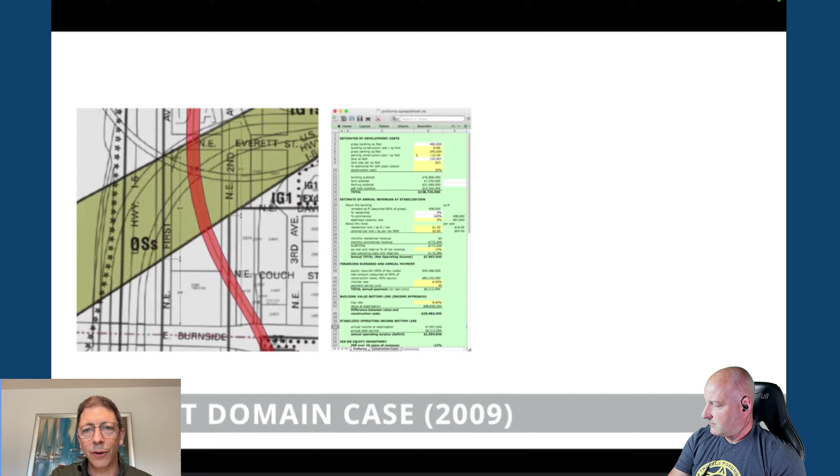But I had an opportunity with a contact who had been hired to work as an expert witness on an eminent domain case. These are condemnations, real estate matters. They don't often go to trial, but in this case it did go to trial. You can see on screen this little spreadsheet. My client was going to testify and didn't think the jury would find his spreadsheets explaining the valuation of buildings particularly interesting. So he asked me for some help to visualize different scenarios they were looking at for massing of buildings and how that affected the valuation.

We did a crude little rendering using some Google Earth background, which was pretty sparse at that time. But it was interesting. We put together trial exhibits in about 6 weeks. Then he introduced me to his clients at the city of Portland, and they were in the middle of defending a civil rights case.

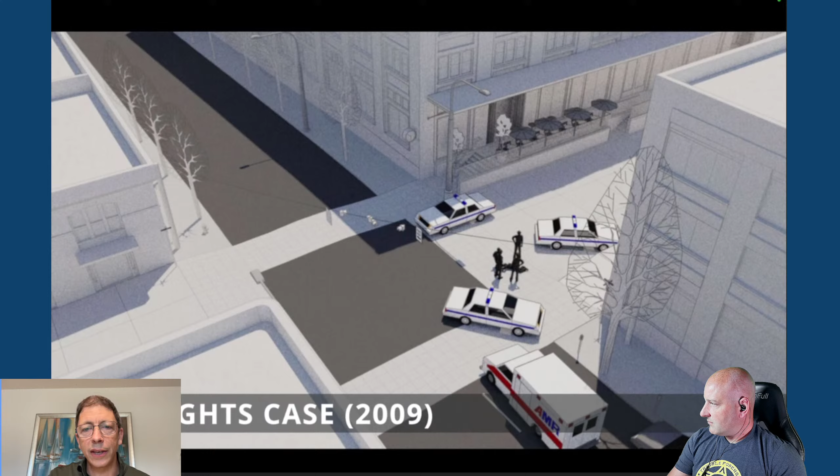We built a digital 3D model and matched it to kind of get a sense for where people were at the moment of the incident, and then created this 3D model, which I'm going to show you now what that looks like. The idea was to use this model in federal court to figure out what witnesses could see at different points. They have a touch screen at the witness stand. We could ask a particular witness, hey, what could you see from where you were standing? Show us where you're standing.

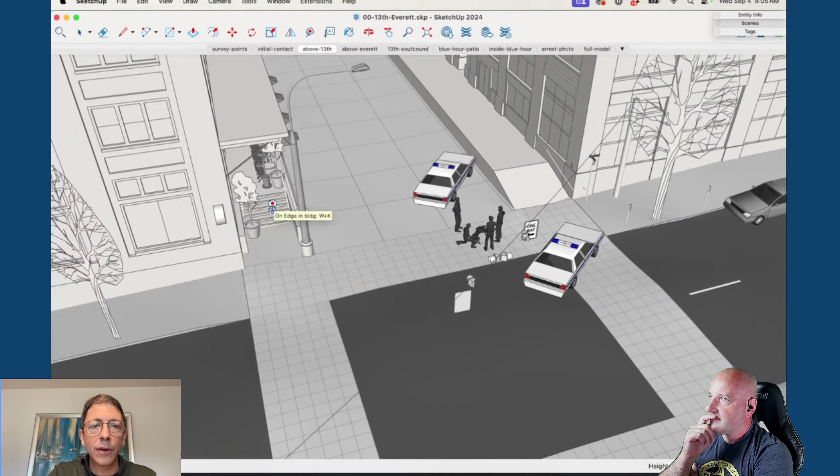Oh, I was on the stairs. We can put them on the stairs and look around to see what they could see from that vantage point. In fact, it worked really well when we tested it, but then they settled the case a couple days before jury selection started. What really opened my eyes to the usefulness of this approach, though, was that we ended up being able to use this model with a whole bunch of different stakeholders in the case.

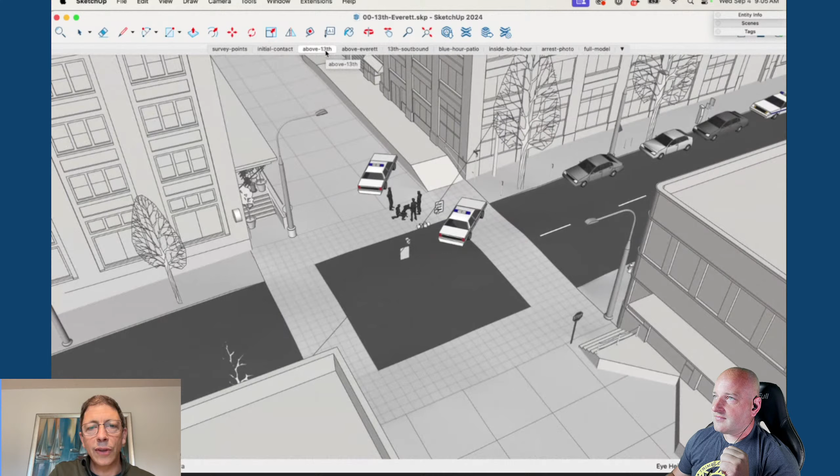So some of the witnesses that were friendly to our client, some of the risk management people, other parties that were in the lawsuit - it really helped give everyone a sense for what were the key issues, how do they need to tell the story, how could they get on the same page about what they needed to do for their case strategy.

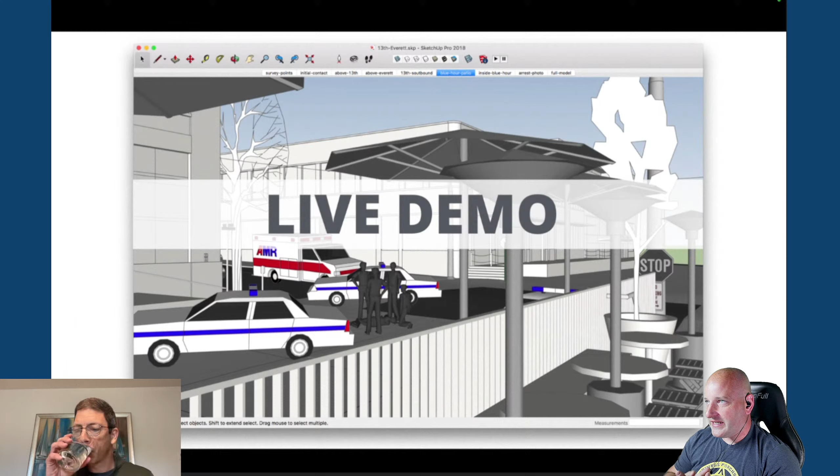Joshua, you know what I really love about that? It is clear and concise, right? It is just incredibly clear. One of the things with your company is visual stories or visual storytelling. A lot of times the photos and the videos, things can get lost in the weeds, right? One of the things I just love is being able to focus the eye, being able to focus on what's important there. That's really, really cool.

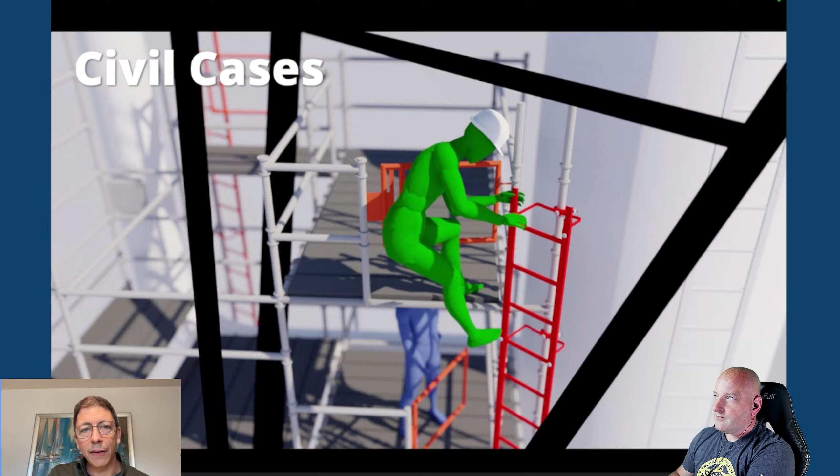Thanks. So today, fast forward 15 years, Fat Pencil Studio is a design firm. We're located in Portland, Oregon, and we use visual tools to help attorneys make a better case. We have 9 people on staff. They have a background in art, film, architecture, construction, and we've worked on over 700 different cases, both for plaintiff and for defense. On the civil side, we do anything from personal injury to civil rights cases. On the criminal side, we've done everything from DUI up to capital murder. That broad base of experience gives us a lot of ideas for how to present different issues in a case. So what I'm going to talk about today is visual stories and how you can use visual stories to make a better case.

And I'm going to come at it from 3 different aspects. I'm going to talk a little bit about scanning and some of the benefits and problems when it comes to using that information. I'm going to talk about our use of SketchUp. And then I'm going to talk a little bit about accuracy, because it's an important part of whether these diagrams could be admissible in court.

So let's start with the scanning. I first became aware of the possibilities of laser scanning going to different conferences, both for the ACSR, the Association of Crime Scene Reconstruction Professionals, as well as the IFSM group. So many of you may be familiar with those 2 organizations. And I saw some amazing stuff in the sessions that I attended. And I asked some of the presenters, hey, these are great scans you're putting together, and how are the attorneys using it? And I guess the answer that I received was, they don't know what to do with it.

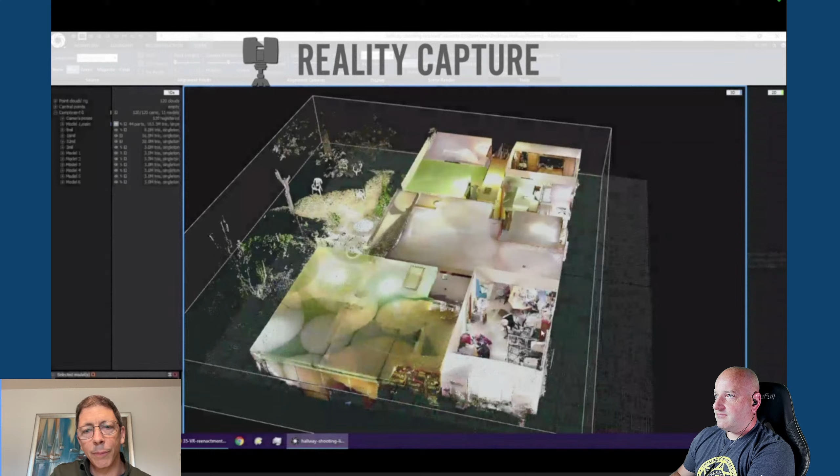We send it to them and they don't know what to do with it. And that was different than the experience I'd had to that point, creating digital models in SketchUp, where we did a lot of collaborative work with the attorneys and experts in the case. So I started to think about why is this a problem, that these great point clouds are being generated and it's hard for people to use.

And if you think about moving that around to cloud storage for different parties, somebody might spend the better part of an afternoon trying to download it, and then they get it on their computer, and maybe it doesn't run because there's different files, they're not compatible with other platforms. In theory, you'd have these packages that would run on any computer. In practice, our experience is it doesn't always work as well as intended if people aren't keeping their software up to date, or there's different versions of browsers and softwares and whatnot. So the technology can be a big barrier to interoperability and collaboration amongst people on a team.

There's lots of, it looks kind of like a picture from far away, and then you get in close and things are disintegrating into points, and you can see through walls, and you're seeing the outside but not the inside of things. So having a little context, we do this sort of thing all the time, is create context for complicated visuals or images, just helping people to know what they're looking at.

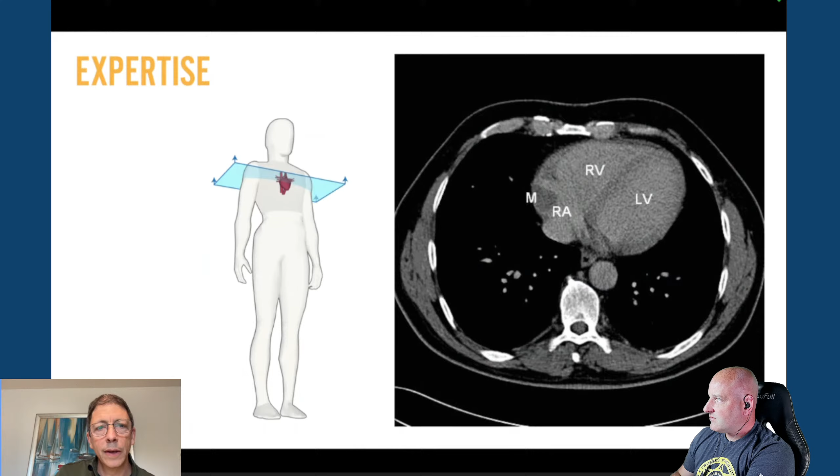And then the final thing that I think is a really an issue that we found working with point cloud data is this idea of storytelling. And how can we add to the data that was collected about a scene in a way that's going to help tell the story of the case? It can be somewhat challenging in these different platforms to add in human figures, weapons, to show a sequence of events. And that's where we've been able to do quite a bit with SketchUp.

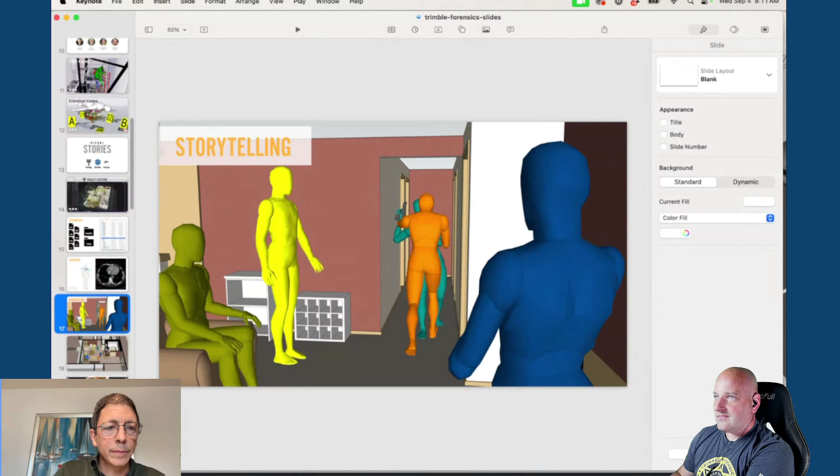Let me just see if I can, at this point, I've got a couple more slides here. This is from a capital murder case that we worked on. You can see here the digital model we built in SketchUp was actually based on a laser scan. And we were able to use that laser scan to measure some key points like the width of the hallway.

And then I'll show you what the actual model looks like. You probably got a peek of this before in the background at the beginning of the webinar here. But let's look at this particular model.

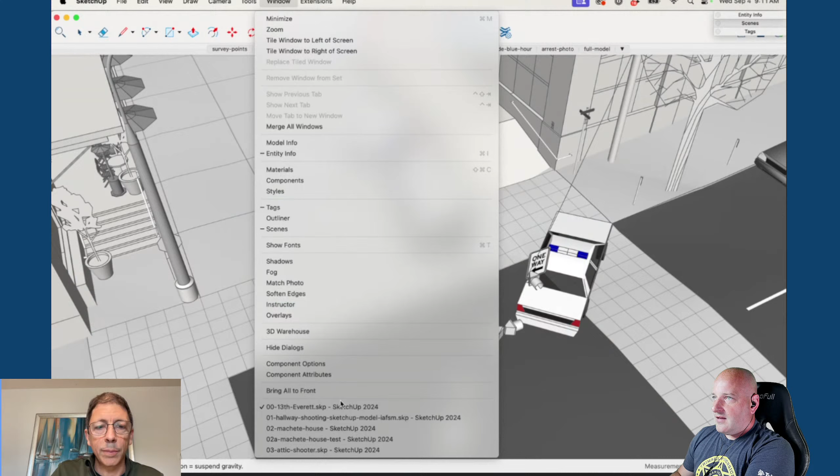And what we're able to do with this SketchUp model is show a sequence of events. So we've got this guy, this sort of teal colored guy who's holding up this family at gunpoint, trying to collect on some debts and a drug dealing gone bad. And you've got, the yellow guy comes back and says, I got rid of this guy's son. He's really upset. Orange guy gets really upset and confronts teal guy.

And then ultimately you can sort of see here, he goes and reaches for the gun. Teal guy's holding it back away from him, kind of pushes him. And then there's a shot. Orange guy dies. Let's look at this from a different perspective.

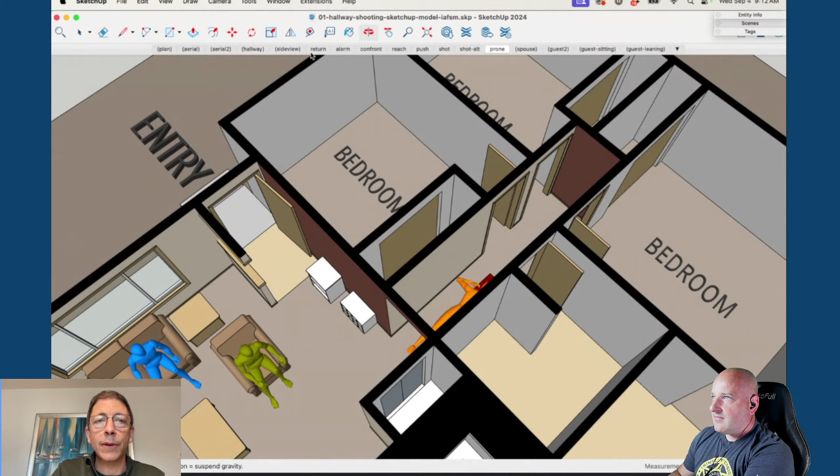We'll go to the side view. And this is, again, one of the great things about a digital model, really easy to look at from different perspectives. So here's orange guy reaching for the gun, pushes teal guy into the doorway. There's a shot, and then orange guy goes down.

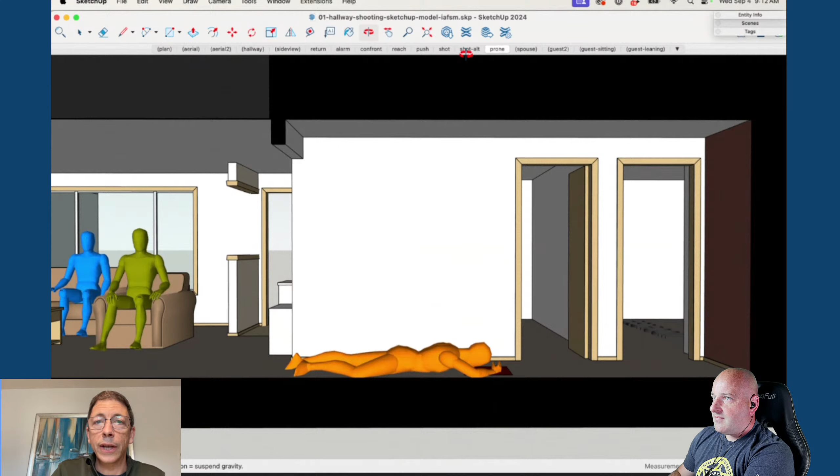And one of the great things about this tool is you can really get in and adjust things as needed. We were able to take this model and to visit with the defendant in custody and get a lot more information about exactly how he remembers coming to fire the weapon and how he impacted the door, and that influenced his pulling the trigger from his telling.

So it's really a great tool to be able to make sure everyone's on the same page as far as what they can see, and what the scene looks like, but also what happened in the scene. And it's really easy to add things. I'll cover that part later about moving people around.

But let me move on to the next portion of the presentation here, and that is talking about how we use SketchUp. I've got an article that I'm going to send afterwards. It's called Drawing to Learn, and it talks a lot about the philosophy, about how the tools that we've learned in the architecture industry and are commonly used in the architecture industry become actually really useful in the process of investigating crime scenes and understanding scenes.

And in particular, I'm going to focus on a case where there was a killing in an apartment, again, probably a dispute over drugs. This one happened with a machete. And I'm going to talk a little bit and demonstrate how we ended up building this 3D model in a case where we didn't have a laser scan for this building.

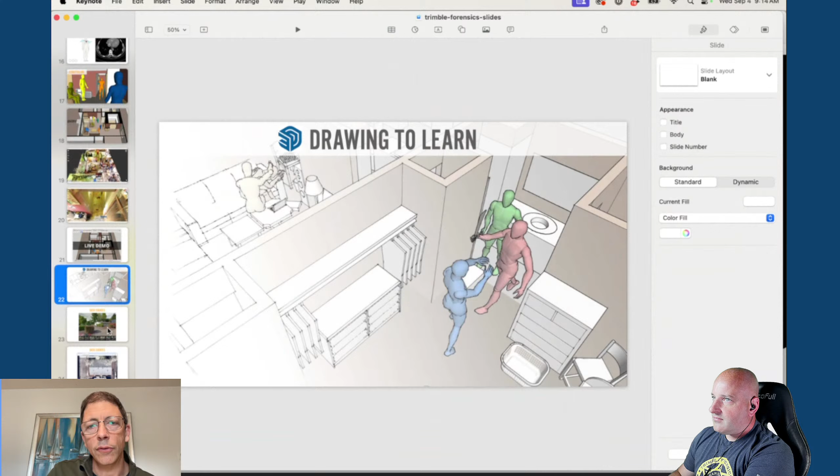And I'm going to start by just talking a little bit about what types of resources we look for to go through that process. So the first thing here, we want to be able to see what the building looks like from the outside.

If you don't have access to Nearmap, that's fine. You can do a lot of the same things in terms of selecting different historical images and measuring them in Google Earth, which you can get both on the web and by downloading a desktop app called Google Earth Pro. But we use Nearmap when we can—it's available in most urban areas, and it is a little bit better in terms of the product for measuring and for accuracy of the aerial photographs.

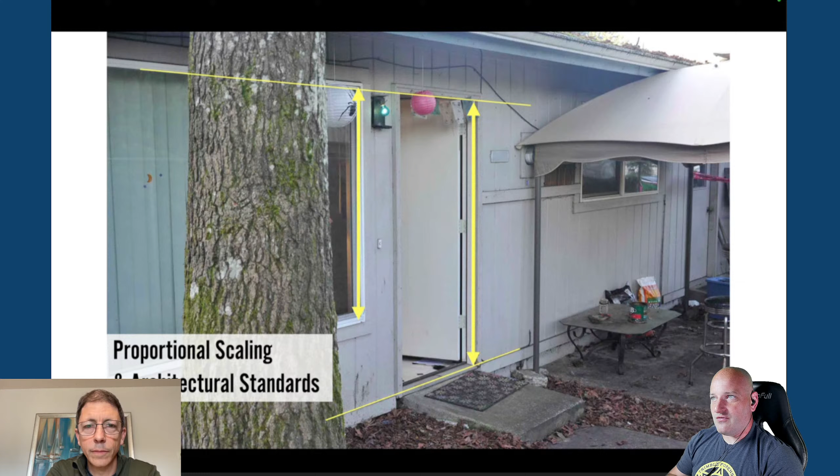While I was doing the job, a lot of times all I've got is a rough sketch, but I still need to be able to tell that story, relate that information. I think it's really neat how you guys use this information to relate that story to the layperson.

Even if we only had a not-to-scale sketch, we probably still know the dimensions of the building because we can measure it from an aerial photograph. We know something about the interior layout because we see windows, and windows obviously go into rooms, and we know something about furniture layout because furniture often has common sizes. We know how big the average stove and refrigerator is, how big the average bed is. Does that mean we'll have great guesses at every last measurement? No, but giving it your best shot and putting everything into a 3D model can be extremely instructive.

In terms of this image, what we're doing is looking at, okay, if we know the height of the door, because that's very likely 80 inches, what can we say about the height of this window? If it was precisely a 90-degree angle, straight-on elevation view, we could just look at the two relative sizes of these arrows. This arrow is 682 pixels, and this arrow is 604 pixels, and I'd do a straight ratio: if 682 pixels is 80 inches, what is 604 pixels?

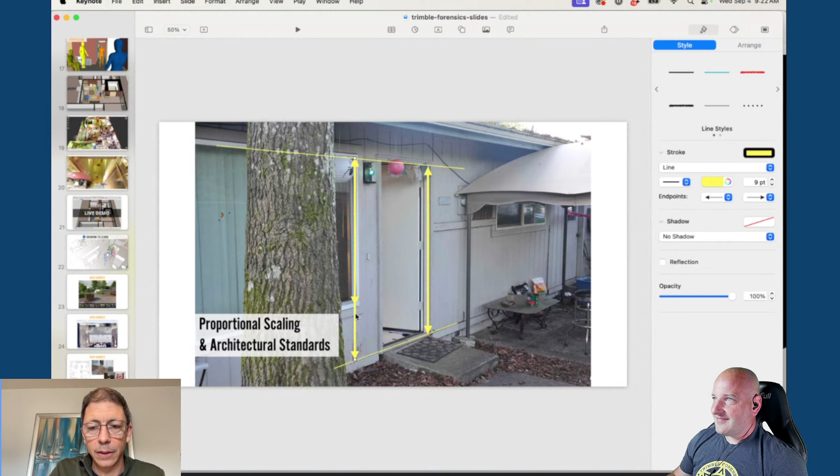But this is not an image that's straight on, there's perspective. So we can still learn what this length is, but we have to apply that perspective. If 682 pixels is 100% of 80 inches, what we're going to do is find out what's the length at that location relative to this known perspective line. That comes out to about 822 pixels or so. Then I find out what percentage — if 822 pixels equals 80 inches, what's this other dimension? And that's a lot of math.

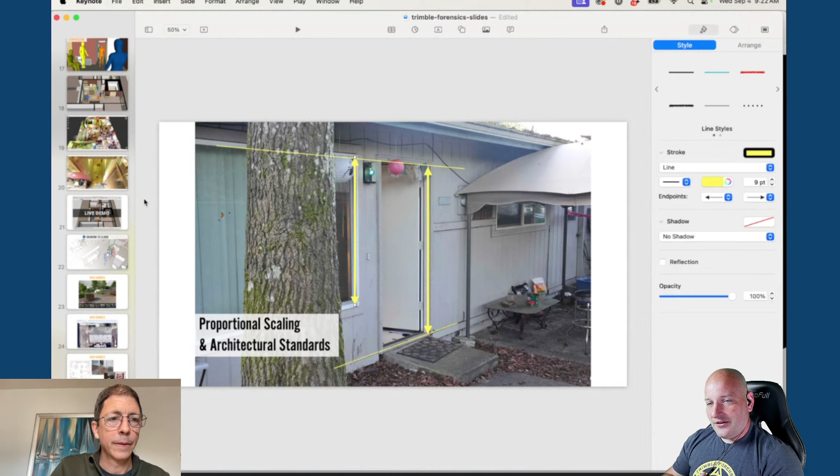Some of the comments coming in are fantastic. One of them, which you hit on, was appliances — your standard refrigerator, stove. As you go through this list, I'm going to add these to this page so we can capture them for future viewers in the notes. So: appliances, fridge, stove, toilets — there's kind of common sizes there. Countertops, that's another good one, there's a standard countertop height.

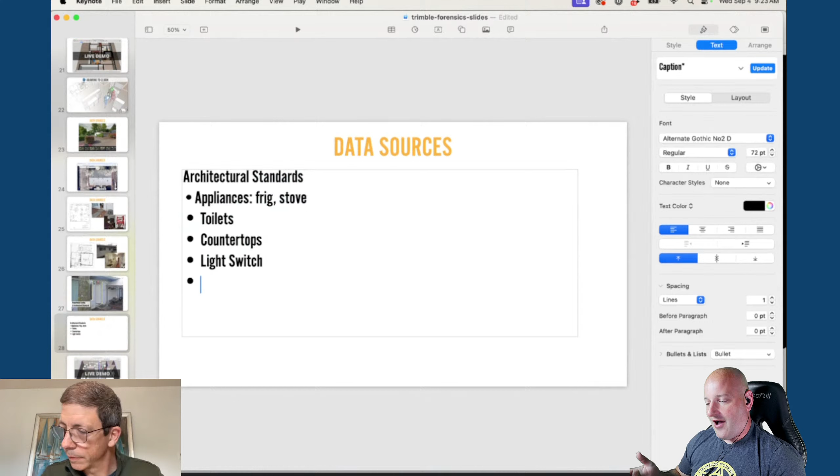Light switches — we can definitely get between the screws or the trim screws on light switches, those are extremely standardized sizes. When you think about it, it's something I didn't consider, how many things are just common sizes, industry standard. Borrowing that from architecture, I think we have a lot to learn from the building side of things, that dimensions are kind of standard.

I'm going to give you a few more here. Doors, probably 80 inches high. But then also in terms of width, there are really common widths — you often have a 24-inch, 28 or 30-inch, or 36-inch wide for residential. Sometimes you get a little bit wider for commercial.

And especially exterior doors, right? Those are almost always 36 inches, unless it's a back door or something really old. Most of those are 36, right? Right, so 36 would be common for an exterior door. 30 is really common for interior. Sometimes you get 24 for a really small bathroom or for a closet, a linen closet or whatnot. And then you get other stuff too, but for the typical doors, these are the most common.

Wall thickness is often going to be 6 inches exterior on residential, and 5 inches or 4.5 to 5 inches interior.

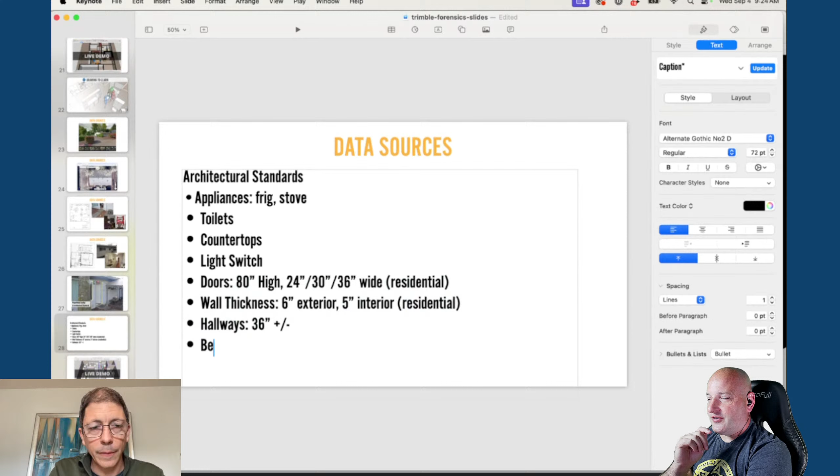And then hallways, very typical, 36 inches, sometimes a little more or less. And you'll always find the less when you're trying to haul a dryer down the hall to the back laundry room, right?

So bed sizes, twin, double. You can look up dimensions of these online.

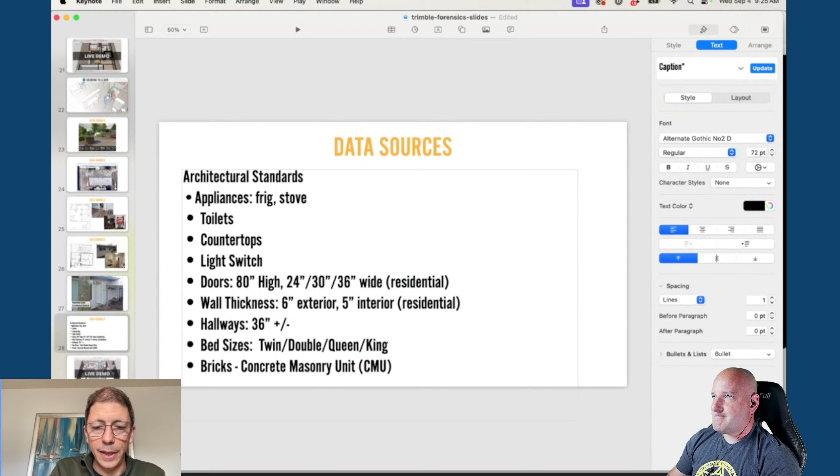Bricks, in particular like a concrete masonry unit, is going to usually be 8 inches by 16 inches.

So that's a few normal ones that we deal with a lot, and just look for those things, and that'll help you develop the model.

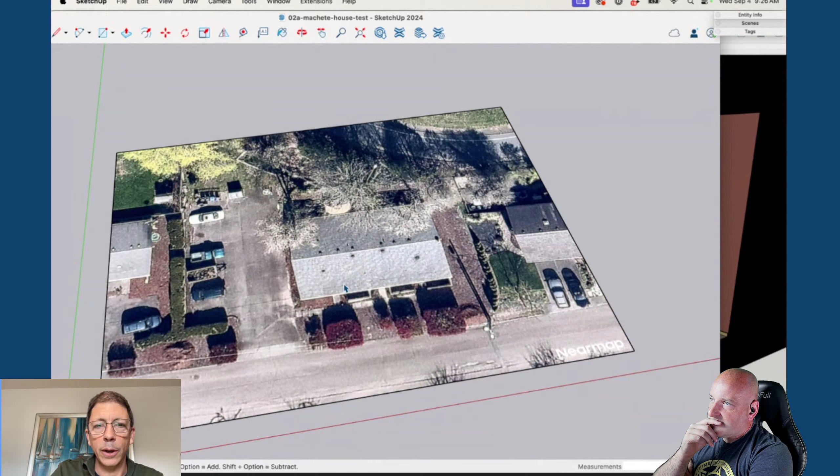So let me do a quick demo on how to put all this together. I'm going to switch over to SketchUp, and you can see in this blank file, I've imported this aerial photograph from Nearmap. I've already taken the step of scaling the largest dimension I had, which was the roof, so 66 feet. In terms of how I would start a model like this, the easiest first thing to do is to model the roof.

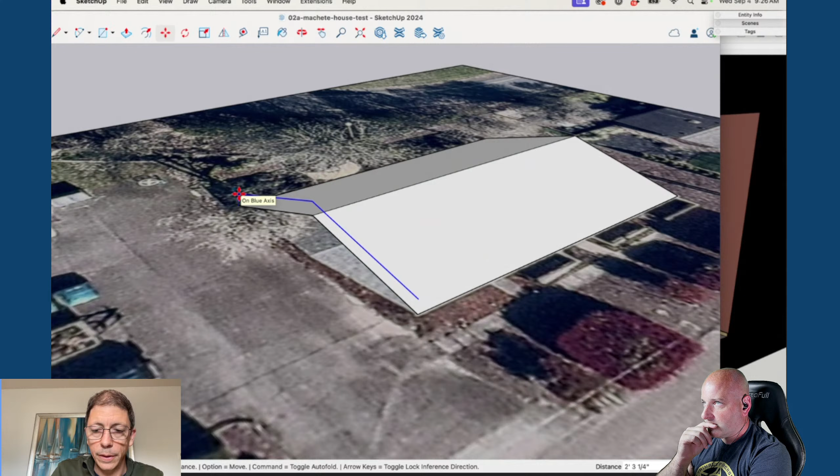So we can make a square there, model that roof. We're going to give it a pitch. And then, of course, roofs have thicknesses, so we're going to go ahead and put, we'll give it a 3-inch, maybe a 6-inch thickness, just so it actually stands out a bit.

Okay, so here's our roof. And then the other thing we need to know, I'm just going to get this out of the way for the moment. We'll move it up just to make it out of the way. I'll move it up 30 feet, but we can put it back down later.

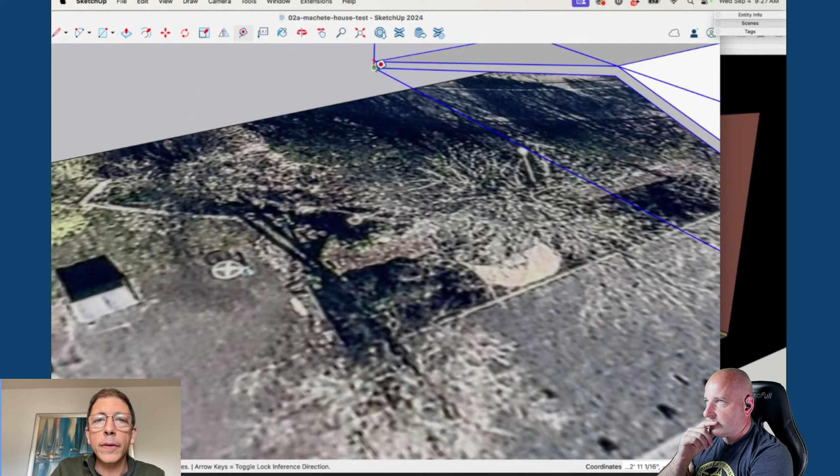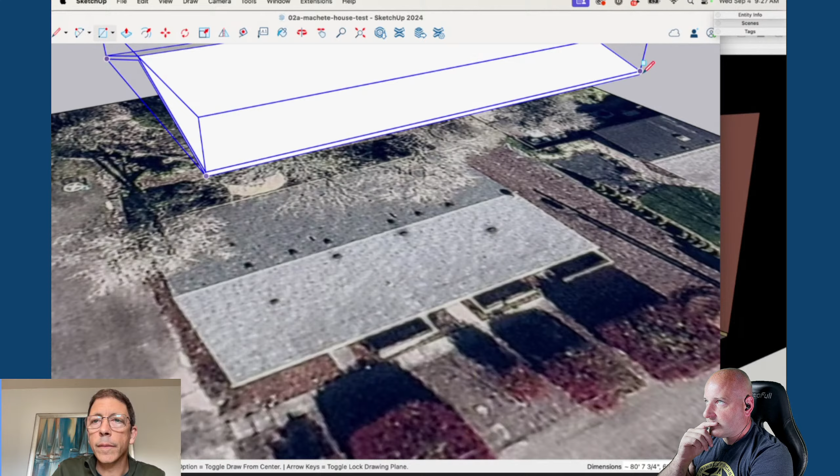And then as far as the walls for this thing, what we need to know is... hold on a second, I'm going to take a rectangle from here to there. We'll move this thing down to the ground.

I'm just going to do this the old-fashioned way here. One of the things about SketchUp is if you don't group things right, they get stuck to each other. So I'm going to need to make walls for this thing. In order to do that, I'm going to turn the aerial photograph off, which I've tagged so we can get rid of that.

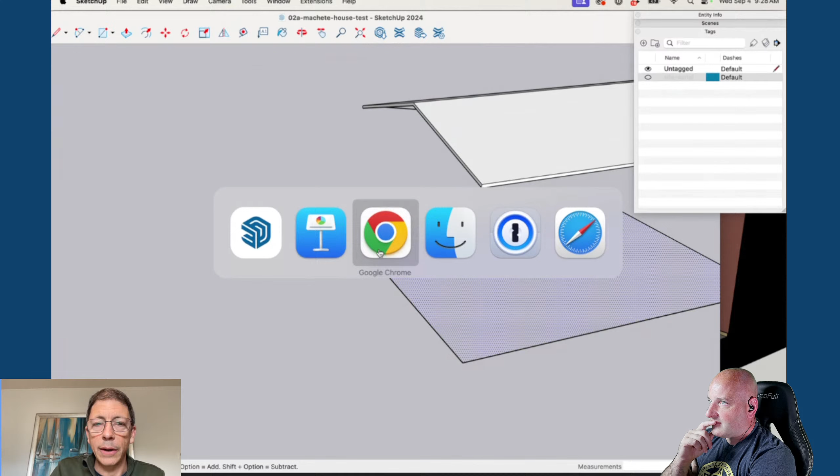And this building has some eaves, so I'm going to take a quick look at those. We've got a view from the street, and we can see we've got the eaves here. So we have to account for the fact that it's got eaves, which means the walls are going to be smaller than the roof. I'm going to say the eaves are 2 feet, so we're going to offset the wall in 2 feet.

So now this is going to be our wall, and the wall is going to be 6 inches thick, and we'll go ahead and pull that up to 8 feet tall. And then this building has 4 units in it, so we're going to need to split this exterior volume into 4 parts.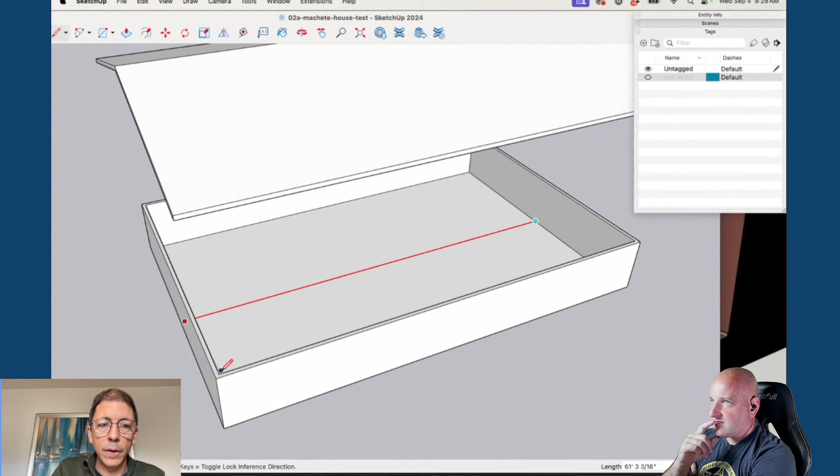Let's make this separation wall 6 inches thick, and we'll move it so that it's exactly in the center. We'll move it 3 inches and pull that up 8 feet. So this is the partition wall.

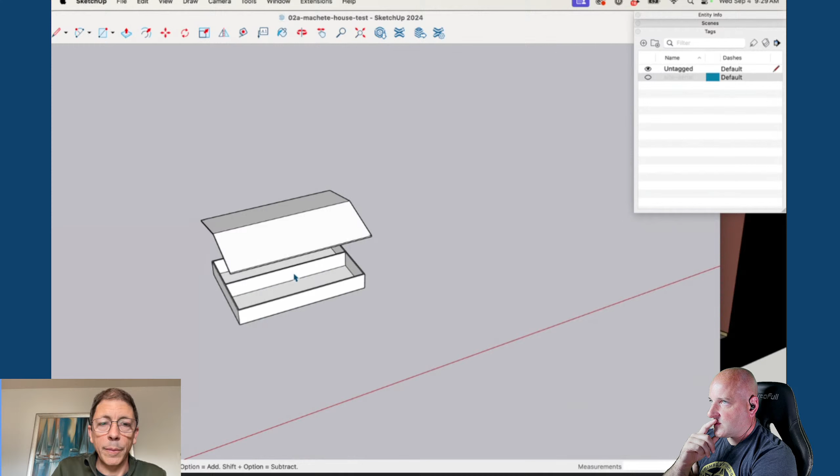And then there's another—let me just make these guys into a group. There's another wall that's going to separate the other units, and we're going to be modeling this one in the back here. So let's go back here and put another separation wall here. I don't really know for sure where the separation wall is yet, so I'm just going to pull it up here, and we can move that around later as we figure it out.

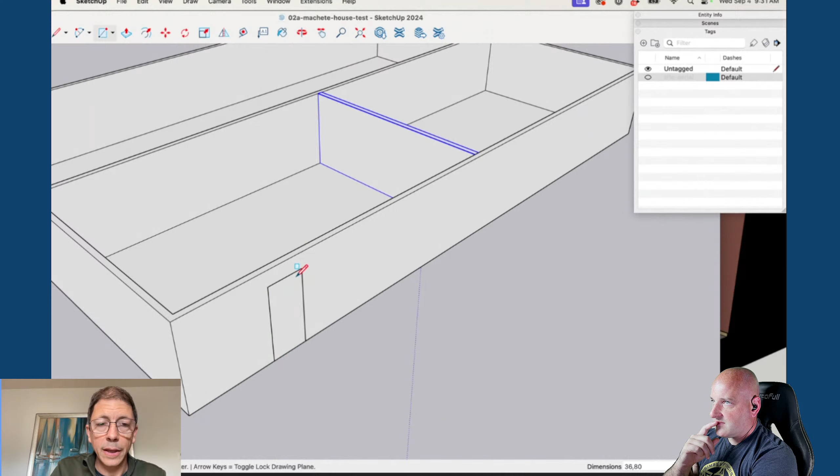The next thing we do is put in the door and window. We know the door is probably 80 inches by 36, so let's go ahead and do that.

So 36 by 80, and we can move that around. Here's where I would consult my measurements. I'm going to abbreviate some of this so we can get on with the rest of the presentation, but you can see I've got measurements we took on site showing we've got a window and a door, taken from inside, showing the position of the window and door.

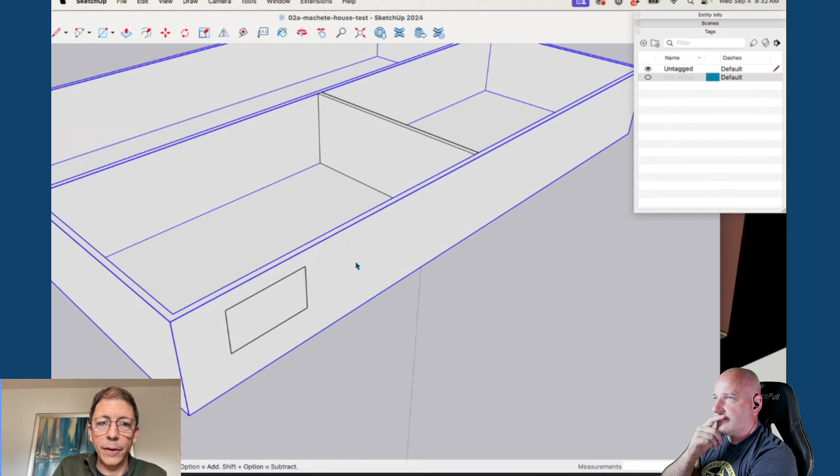We know where the door and window are in relation to this wall. I'm going to go back into our SketchUp model and say okay, there's a window here, maybe about like that, and the door. I didn't actually get this in the right group, so let's fix that. Now we can put the door through, and the window.

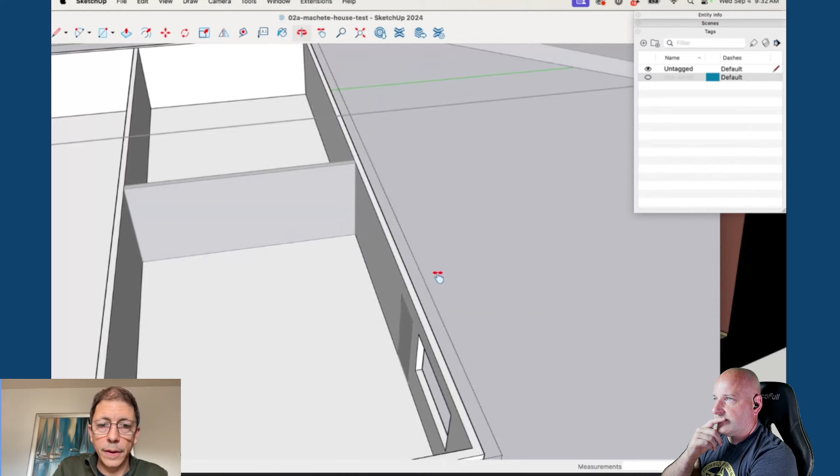Then there's a wall here, and these interior walls are going to be 5 inches wide. So let's say this is 5 inches by 14 feet, and bring that up. If I was doing this more carefully, I would have gotten the dimensions from my measurements. We'll just do one more here.

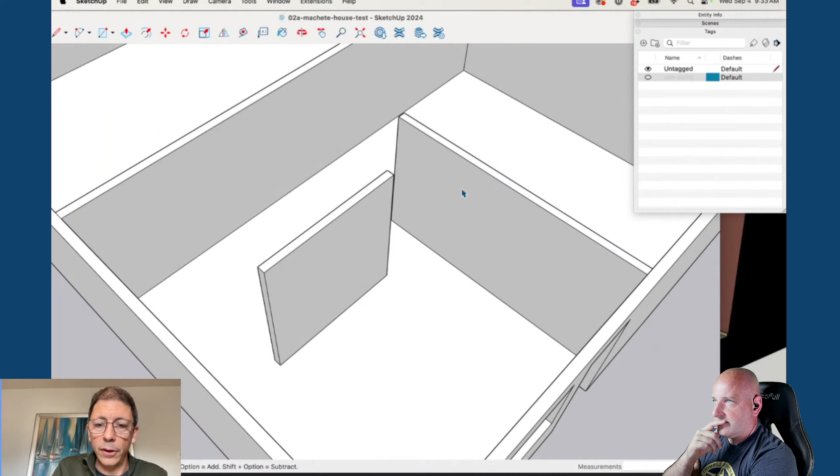There's a wall right in this area, and this is going to be, we'll call it 8 feet, and that one's going to go up to the ceiling as well. You can see this all coming together. We've got the bathroom back here, the bedroom here, the kitchen, and the living room.

I'm going to switch over now. I'll save this so we can use it later if necessary, and publish it onto Trimble Connect too, so Chris can get to it as needed. Save to Trimble Connect, put that here, replace it. Then I'm going to switch over to the finished version of this.

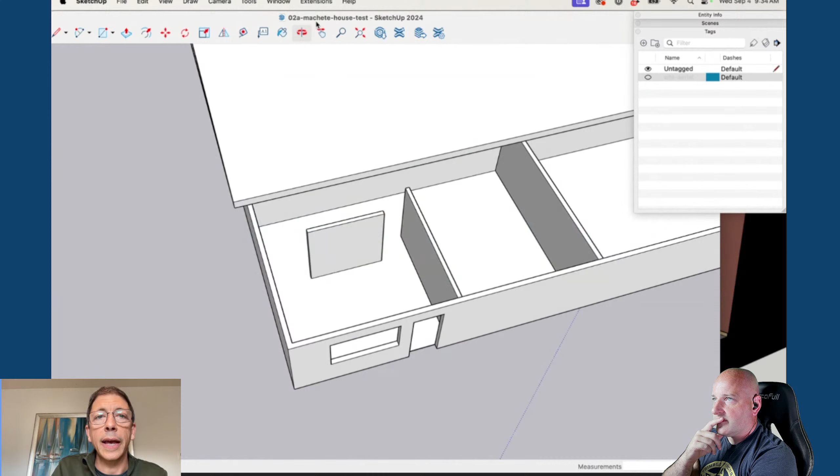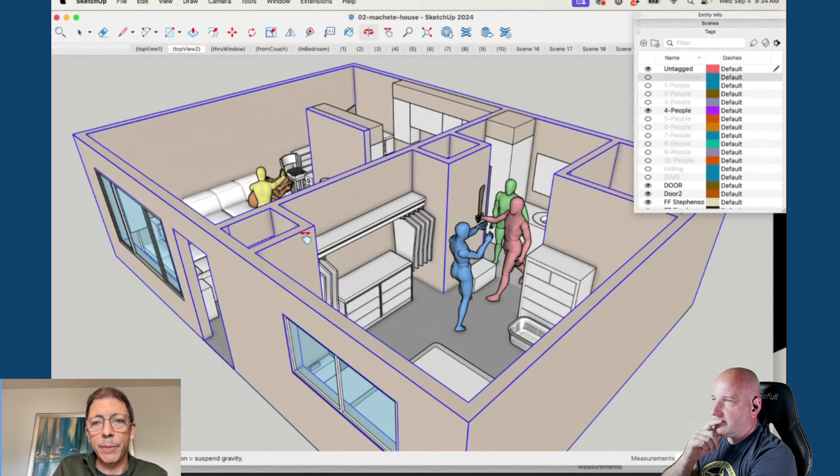You can see how we use this to tell the story of the sequence of events. It started with a couple of residents of the house, the orange guy and the blue guy. They're inside. Some people come to the door, he opens it, they barge in. They're going to confront the blue guy, but one guy holds the orange guy at gunpoint while the other two take the blue guy into the bedroom. They start getting in a fight, and this guy pulls a machete out. Then blue guy bolts, and they chase him and corner him in the living room.

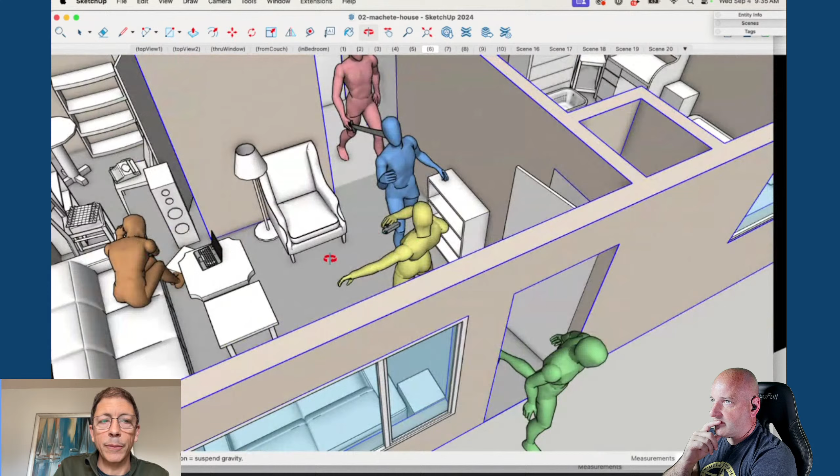This guy comes away from orange guy, pistol whips blue guy, and then says to the other guy, 'all right, take care of him.' So they go after him with a machete, and he's now mortally wounded. These guys take off, and orange guy takes off too, and here's where the police find him.

You can see this was a way for the attorneys to get a handle on what was happening in the case and make sure everyone was on the same page about what would happen, and also to test ideas about what a person could have feasibly seen from their position.

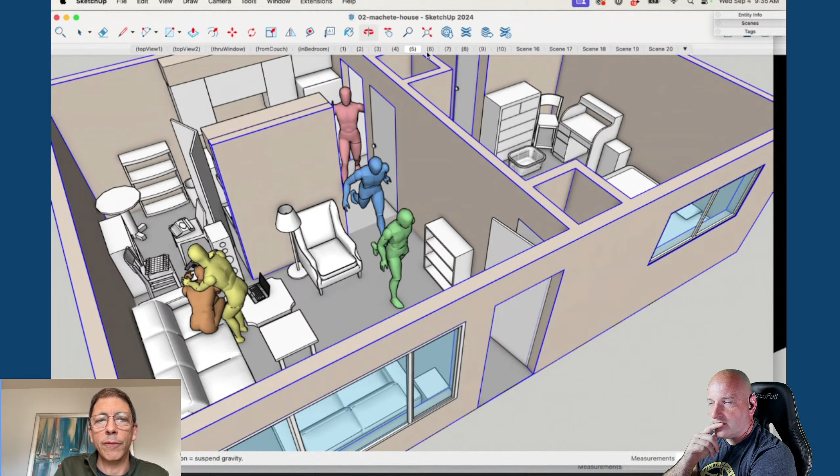So for example, if we talk about a confrontation in the bedroom, is anyone over here going to be able to see what that confrontation was about? We can get in here and look at what this guy's view was who was being held at gunpoint, and what the view was of the guy doing the holding. We can even, if necessary, put a camera right at that person's eye position and say, okay, from here, what are you going to be able to see?

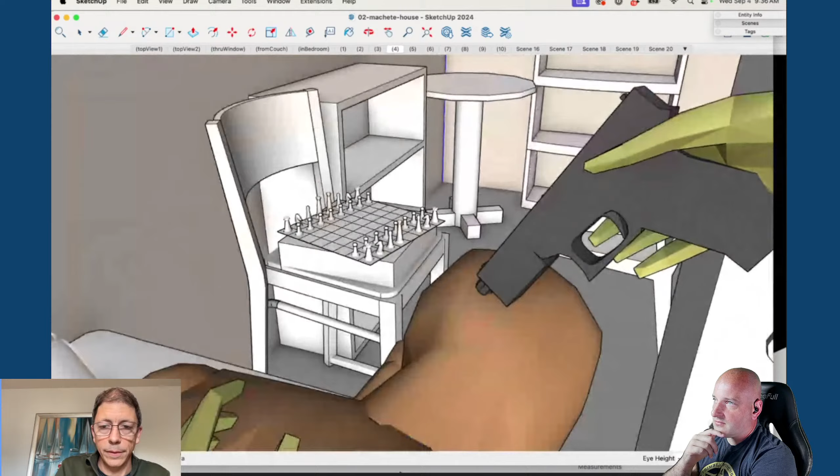From here, you could probably see orange guy, but not so much about what's going on in the bedroom. You'd have to be all the way over into the kitchen, and that even wouldn't work. All right, so that's a good stopping point for that project.

I'm going to switch back over to the slides, and in a minute I'm going to start talking about admissibility. But I'll just pause for a second and see, Chris, if there's any questions that came in we need to address. Don't have any questions coming in.

I think it's really interesting how you're positioning the people and the avatars and just giving them solid colors. We're not giving them freckles or glasses based upon this person was supposedly there wearing glasses. We're not giving them hair that moves in the wind. We're giving them rather nondescript looks. And why is that?

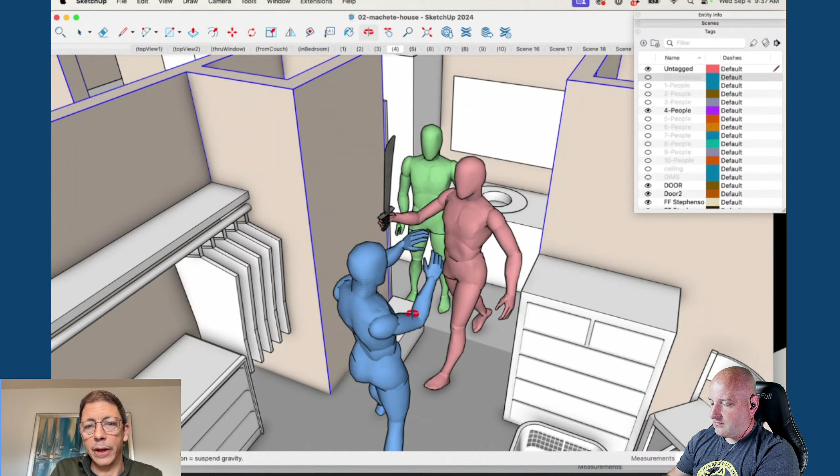So I'm glad you brought that up. A couple things. Number one, as far as moving these folks around, you're seeing the finished version of this, but in order to have this be really useful, we need to be able to move these things fairly easily, ideally in real time during conversations with the team, or even one of the witnesses.

So one thing we can do is turn on this layer for the handles, and you can see all these little reference points appear on each figure. We can drill down into each one and select that individual limb and move it around as needed in real time. This is not quite as robust as having a rigged human figure, where you have a skeleton inside and you adjust its position, and then the skin of the figure moves to respect those movements.

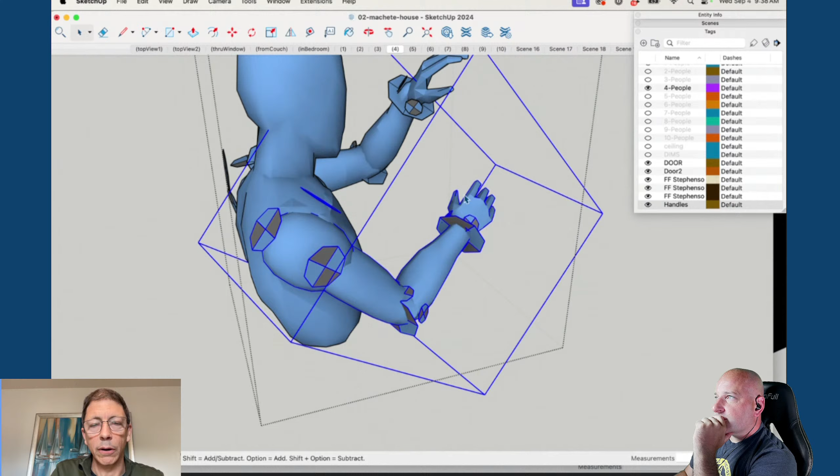But it's much easier to do in real time, and most important for us, it works in SketchUp, where SketchUp does not support rigged human figures. You'd have to go to a more robust modeling platform like Blender or 3D Studio Max to get that functionality. So that's one thing we can do as far as moving the people around in real time.

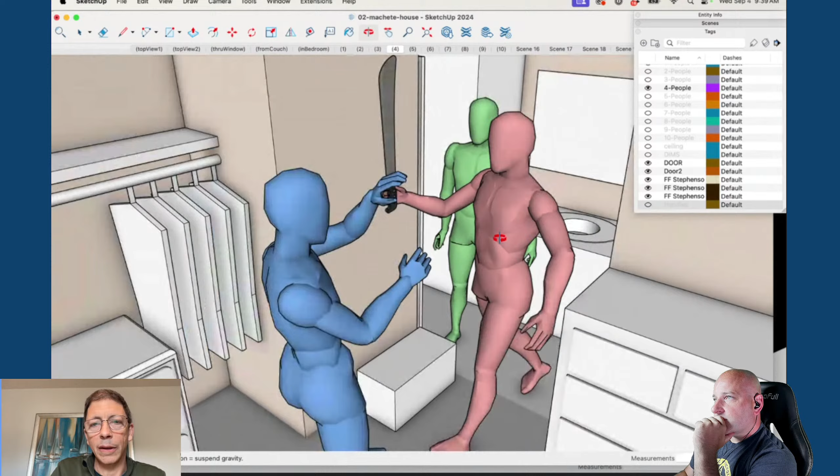The other thing that's really important is our philosophy has always been to try to keep the diagrams as simple as possible. So you can see we've used color coding to help differentiate and track people's location between scenes, assigning an identity to each figure. We can easily scale them for height as well.

You can see here, if this person is let's say 6'1" right now, but if I learn actually he's only 5'7", we can go ahead and scale that figure a little bit as necessary to make that change.

But what we don't do is add facial features. We don't add body mass changes, hair, clothing. There's a reason for that, and it's twofold. One is that it's actually quite challenging to make those items look realistic, and people are very good at spotting human elements in an image that look unrealistic. You quickly get into this area often called the uncanny valley, where something looks kind of creepy because it doesn't look very realistic.

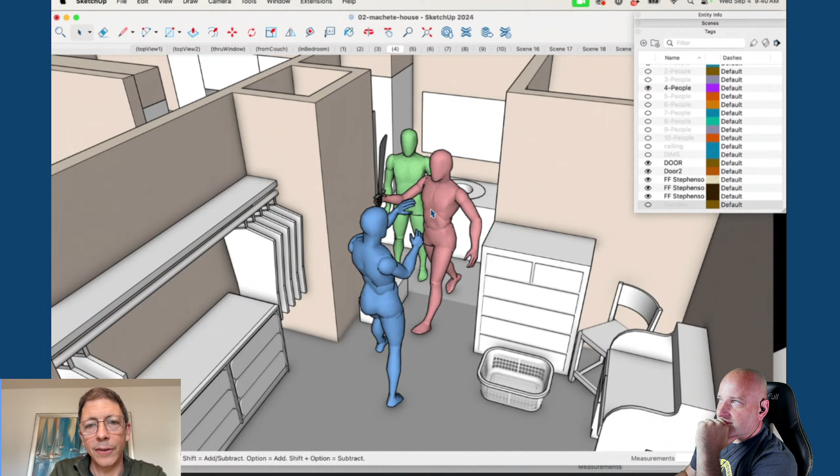So we're trying to stay away from that by making them humanoid, but not adding details that might look uncanny and therefore be distracting to the viewer. The other reason we don't add those features is we often don't have good foundation for what they would be. How do we know what the hair would look like that night, or what clothing they were wearing and how it looked on their body?

How do we know their body mass and exact proportions of muscles and weight? Oftentimes people will ask us, 'Oh, this person was overweight, can you make them look overweight?' And we just say it's not a good plan unless we have a scan of them to really understand precisely how their body mass is distributed.

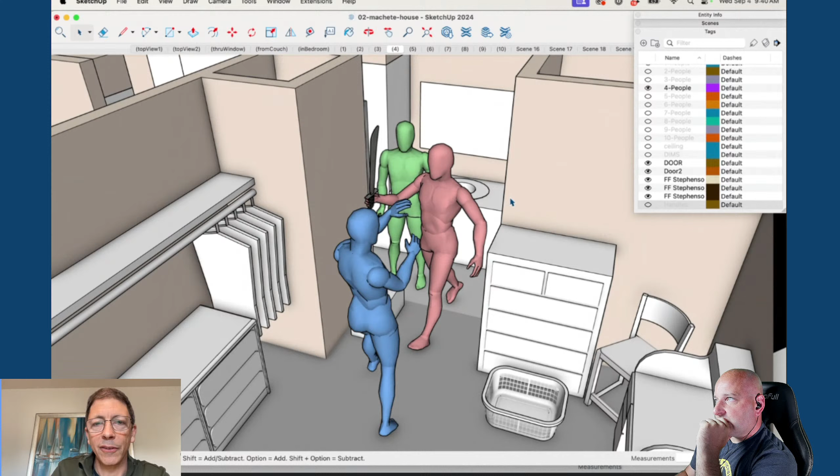Otherwise we're guessing, and that's going to be something less likely to be admissible in court if it were to come to that. So we just try to have these human figures be there to help people understand what happened, and less about trying to be an exact replica of the person in the scene. So yeah, it's all about where do we spend our time.

We only have a certain amount of time. Where do we spend it? Do we spend it making hair and eyes that are the exact color, or do we spend it relaying the sequence of events and how the event unfolded? Where do we put our time?

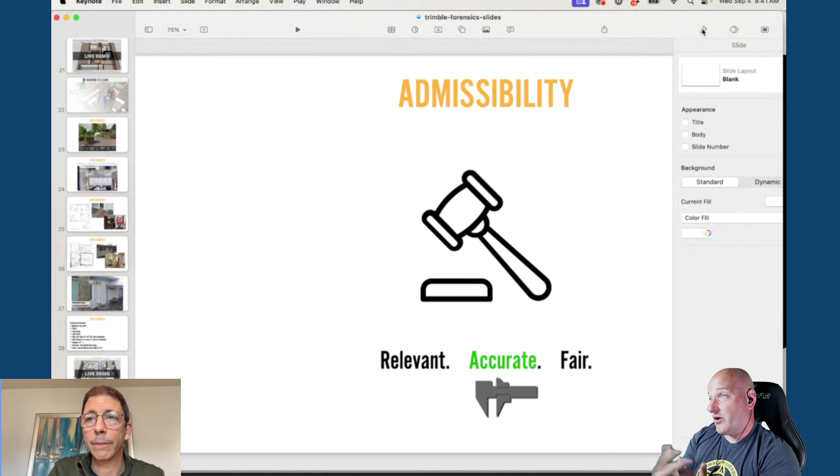That's kind of a good segue into admissibility, because while it's not always the case that you have to have everything be precise at the beginning, we often suggest working with whatever you've got at the beginning, even if you don't have a laser scan, work with what you have.

But ultimately, if you're going to go to court, you need to be thinking about how a judge might rule on admissibility. The key things are going to be, is it relevant to the case? Is it accurate? And is it fair, as opposed to presenting things in a prejudicial way.

I want to focus in on this accuracy thing, because it's one of the things that often comes up with the kind of work we're doing here that is not necessarily an exact replica or an exact laser scan of the scene. How do we know that the reconstruction we're doing is accurate? One of the things I always talk about first is that I get this question sometimes: well, how do you know this is exactly right?

The thing I want to always impart to people is there's really no such thing as exact. It does not exist in the world of measurement, because there's always some level of uncertainty with any measurement device. It's really important to understand what that is and think about how it impacts what you're trying to do.

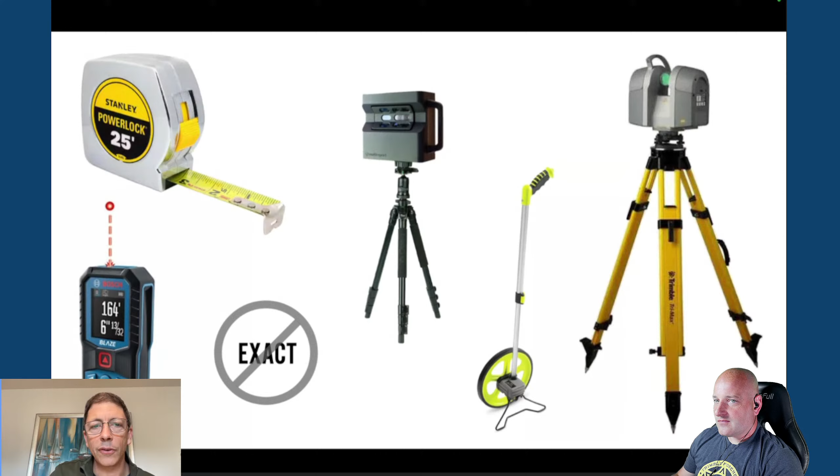But maybe it's a 16th of an inch accurate - that's kind of what you'd get with a tape measure. Then you have other devices to survey that could, in theory, be more accurate. But the second question is, how are you using that information in terms of what's the underlying accuracy of what you're measuring? I think this is sort of my best shot at an admissibility checklist as we do our work.

The first thing is, are we using the best information available? Sometimes we have a laser scan, and if so, we'll use it. Sometimes we don't, and then we'd say, well, what's the next best thing that we have? Maybe we can get hand measurements. If not, maybe we have pictures from the scene that we can combine with known things from known sizes to do the best we can.

Even if we don't have any interior pictures at all - like we modeled a single wide trailer the other day, and we only had exterior pictures, but we had an idea what single wide trailer layouts are typically. We could see the windows into the various rooms that gave us a clue as to where they are. We might not have the dimensions exactly, but it was still useful as an investigative tool to work with the witness about explaining where things were, because pictures are always going to be more descriptive than just trying to explain things in words.

Second thing on the checklist is, what's our basis to know the location of movable objects? Sometimes we have security camera footage that we can look at landmarks in, that are at a known location that are measurable on an aerial photograph or whatnot, and then look at the position of different people or vehicles in relation to those landmarks, and that can provide a pretty reliable location of where people were.

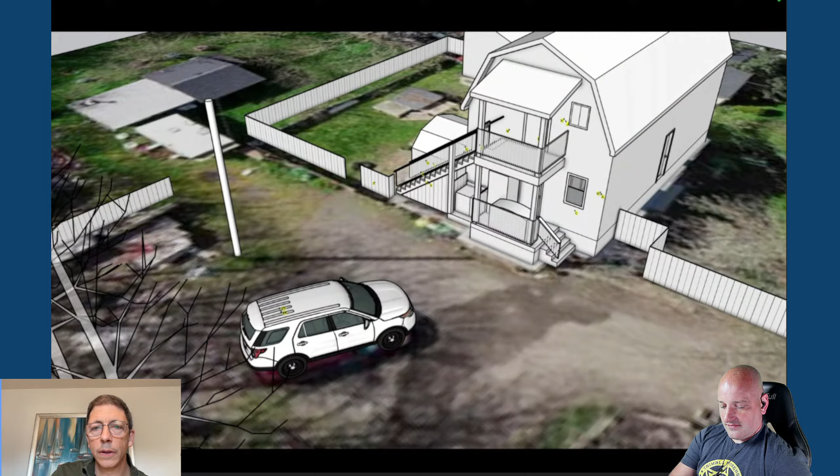Most importantly, was this person, who was charged with attempted murder, able to be aware that there was a person in that house and target them?

That's where we were able to look at the scenario, look at what the view through the window was into the only portion of the front facade of that house across the way that was see-through, the upper portion of that window you see in the distance, identify what that field of view was, and compare it with the witness statement of how they came to be in the position behind the door where they got shot.

So you can see from this cone of field of view that there really wasn't any way that this person in the attic was even close to being able to see that person's position coming down the hall and target them.

So if you were asking, in this case, if there was a person at the sink in the kitchen, were they inside or outside of the field of view, maybe we wouldn't be able to tell for certainty, because if we're off by 6 inches on our window position, which is the limit of what we could achieve just modeling from pictures, we might not be able to tell for sure if that person was inside or outside of the cone of field of view.

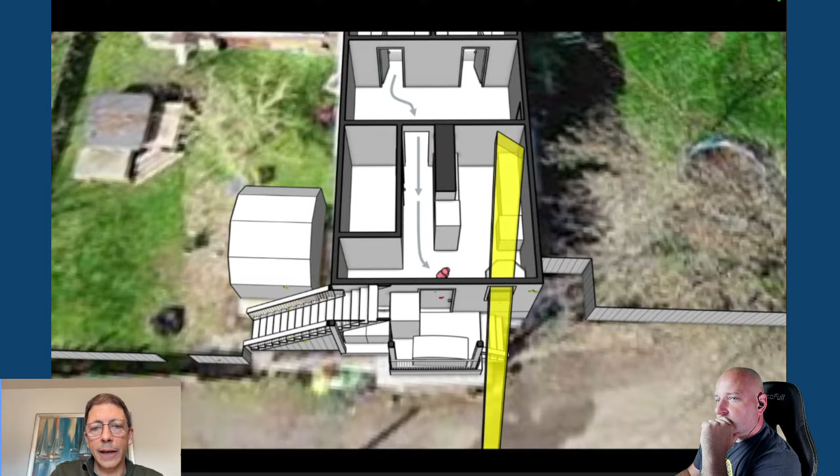I'm going to give a quick view of that model, just so you can see what that looks like in SketchUp.

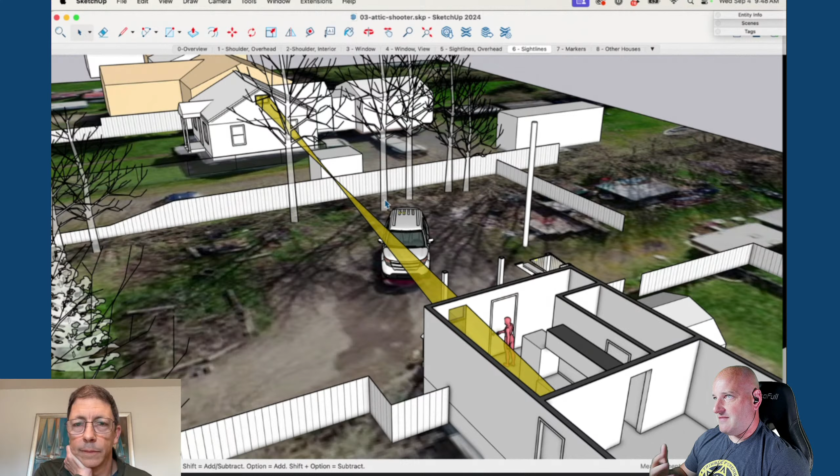Joshua, while you're opening that up, I had a question come in: do you use the layout feature of SketchUp with your 3D models, taking them from SketchUp 3D over into Layout, or do you just find using SketchUp in 3D to be easier or better?

SketchUp has a feature, a program called Layout, that's existed for quite some time, and it's primarily designed to create two-dimensional page layouts from a 3D model. It's akin to what you might do in AutoCAD, where you have a model space, and then you can create a paper space with viewports to the model that allow you to set up scale drawings on a particular size of paper. That's really useful for architectural projects, where you're going to print on a certain size of paper for your plan set, scaled at 1/8 or 1/4 scale, and you can set that up and print it to the accurate dimension.

We often create things like these 3D perspective views where a measurable scale isn't meaningful, so we don't tend to do many typical drawing sets at a particular scale. Instead, we're often making presentations where we're exporting a series of images from the 3D model and putting them into a PowerPoint, like the slides I was showing you today. If there was a feature in Layout that streamlined the production of viewports into a PowerPoint export, we would probably use that. But there's not.

So what we tend to do instead is export a series of images and then just quickly drop those into PowerPoint slides, or make a poster board, or a PDF or whatnot. But yeah, we don't use layout too much.

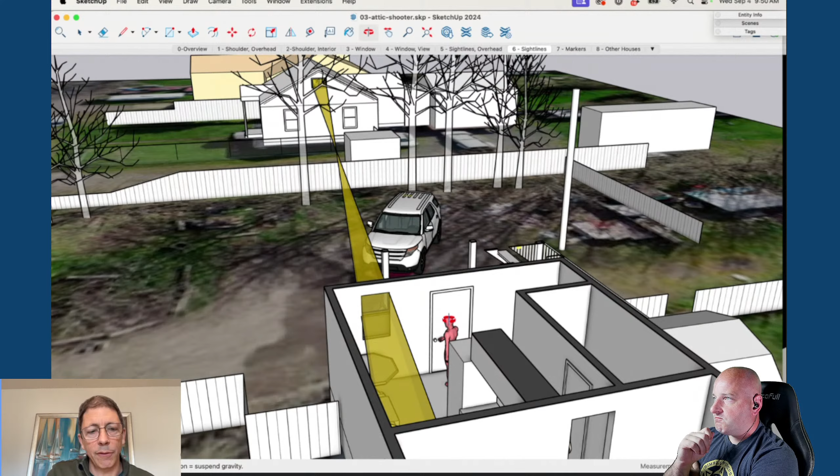a few measurements that were recorded for the bullet strikes by the investigating officers. Then we came back like 6 months later when we actually were able to get a copy of the laser scan in Discovery and updated the model to include that more accurate information. It did result in a slight change to the facade of this house.

In our original model, we had gotten the shape of this roof a little bit wrong. And when I say a little bit wrong, it might have been off by a foot or so, and in a direction.

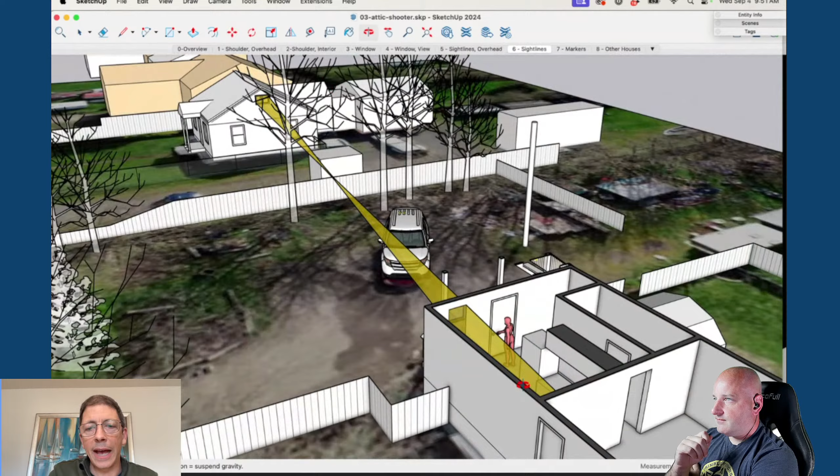We had better terrain information for the site, so we could see the relative elevation of this house to this house. So all that matters, but it didn't matter to the question we were trying to resolve, which was what could you see from this attic into this house. I knew going in that whatever changes we might have by getting more accurate information, it wasn't going to change the answer to the question.

So I think that's a good place to move into the beginning of our wrap up here. This is a question I want to spend a little time on, because I think most attorneys - and I don't know, we'll see if any of the other folks on this call who are crime scene investigators or whatnot have a similar experience.

But in my experience, a lot of attorneys don't think very much about exhibits or visuals until they realize they're going to court, which is, of course, a tricky time to start creating all this stuff, because it ends up in a lot of really quick preparation of graphics right before a trial.

And what we suggest is to take a different approach, and that is to think about the production of visuals as you would any other expert that might get hired to work on a case, and bring them in early. Think about what things you might want to do very early in the case to provide value and usefulness to the entire team as time goes on.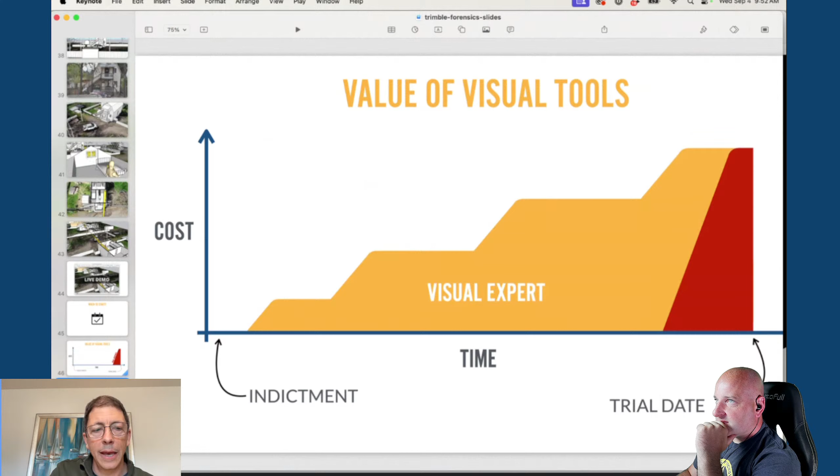And then ideally, you use that material to get it settled before they have to go to court. Then you end up not having to go through that very expensive preparation and last minute fire drill to get the trial exhibits ready.

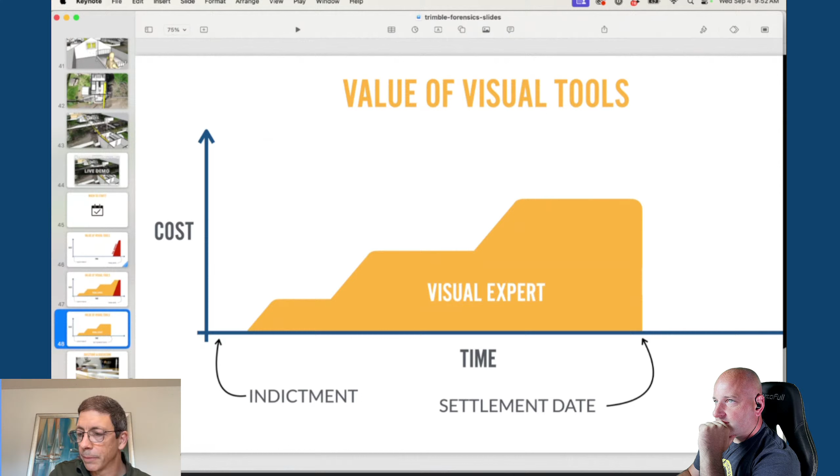And then maybe the last thing I will point out before moving into Q&A is that we rarely are working alone on cases like this. Almost always you're going to have officers and investigators working together as a team to collect information at the site. They have to collaborate with the DA and other paralegals in that office, and perhaps experts.

You're probably going to have to switch, send information back and forth in Discovery. And what ends up happening is people oftentimes get siloed, and they get their own view of the case, but are not necessarily understanding the big picture.

But using a tool like a 3D model early in a case to develop that visual story really helps everybody see the big picture, and ideally work to resolve the case before trial. But if you're still going to trial, you know that you're going to be really well prepared, and there's no better feeling than going into trial knowing that you're really well prepared to testify or to win the case for your team.

So let me call it quits there for the prepared slides. I'd be happy to take Q&A or other questions you might have, Chris. I've got those models I can certainly bring up and look at different issues if you have questions or want to see more.

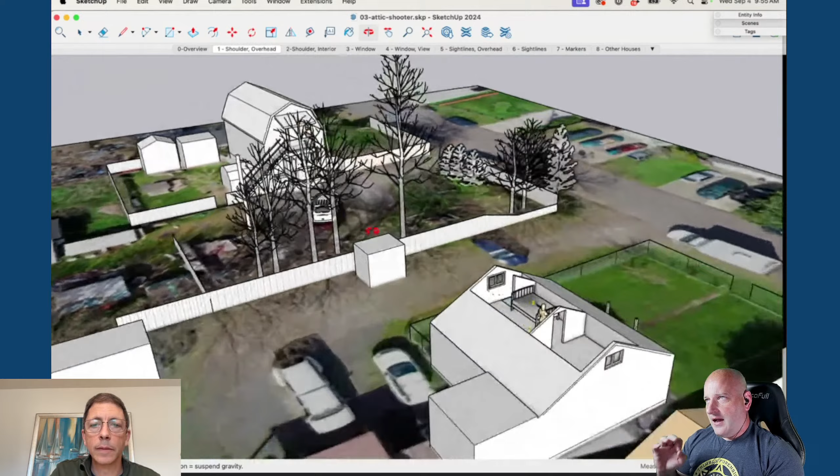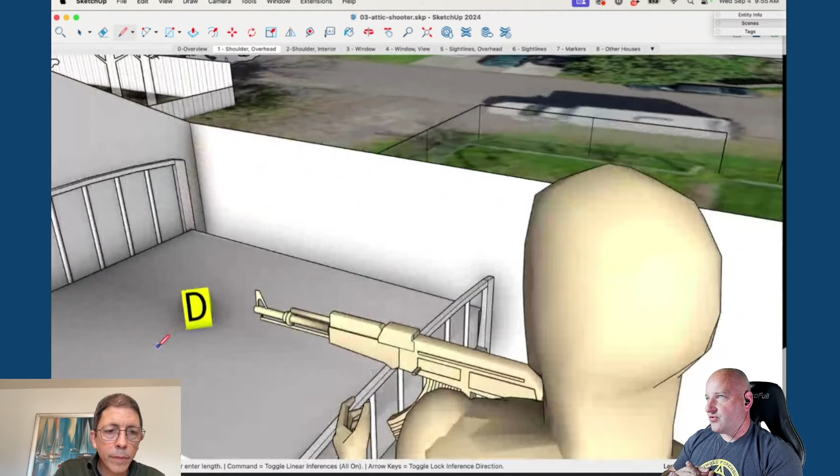Had a question with Reveal. Somebody said in Reveal we can pull out trajectories. So with Reveal you can import your laser scan data, pick points on the point cloud, and then draw out a cone of possibility from that LiDAR scan data or a vehicle. Do you use SketchUp Studio with the ability to import point clouds, the same way, to pick points on a point cloud and come up with answers to where this shot likely came from? So I am not aware of a specific trajectory tool in SketchUp Studio.

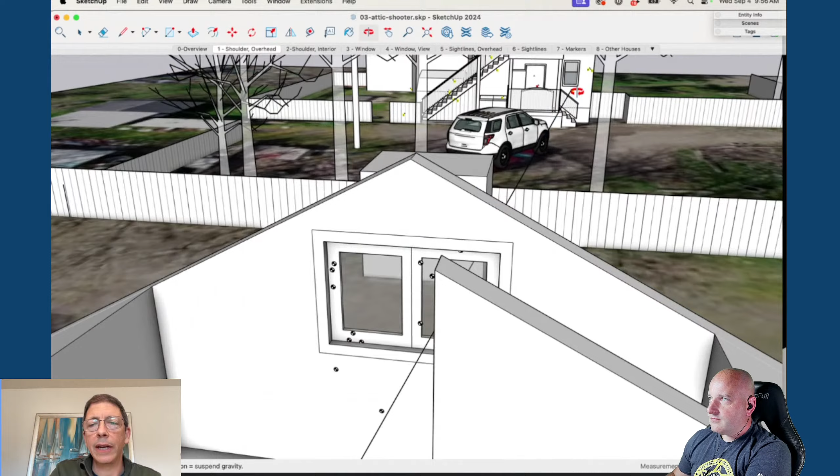We often use SketchUp Studio to provide immediate feedback on 3D models we're making in SketchUp, because we can register and bring in the point cloud, turn it on and off, and get good feedback about whether we're making the window the right size, or whether we need to make all these individual bullet strikes in SketchUp, or just turn on the point cloud and do a quick test.

Here you can see I took a line from strike D and brought that back to the rifle. In certain cases where it was really important, we actually set up a situation where we could connect this trajectory to something on the weapon, and as we move this person around, the trajectory moves with that person in order to see how that impacts other things that might have been in the way of the trajectory, and what's possible. We've drawn cones too. So all that's possible to do in SketchUp, there's just no tool set up to do that out of the box.

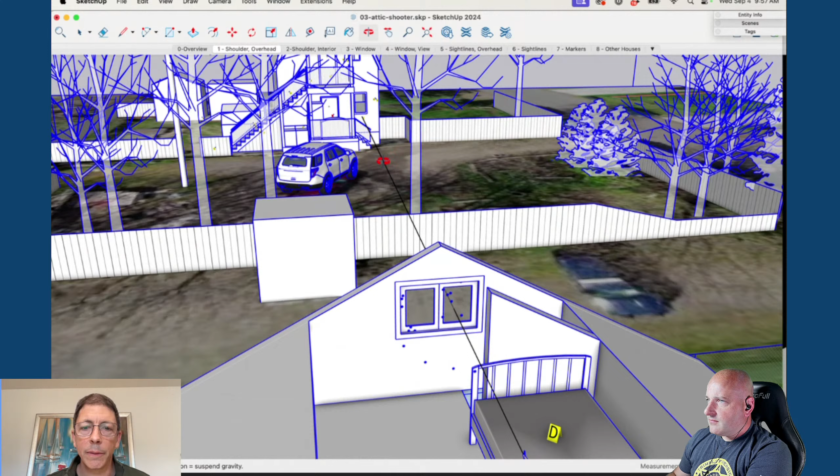And we're not simulating an actual bullet trajectory here, we're just modeling it as a straight line, which is often good enough for a short range shot. But for something long range, you might want a ballistics expert with software able to simulate the actual parabola of a trajectory based on the likely exit velocity for that weapon. That's something that could come into play with a ballistics expert. When we create exhibits for cases and collaborate with ballistics experts, they provide information or guidance as to what they want to see in those exhibits, so when they testify in court, they can say the exhibits were created at their direction. I don't think there's anything else I wanted to say about bullet trajectories, it'll come to me later.

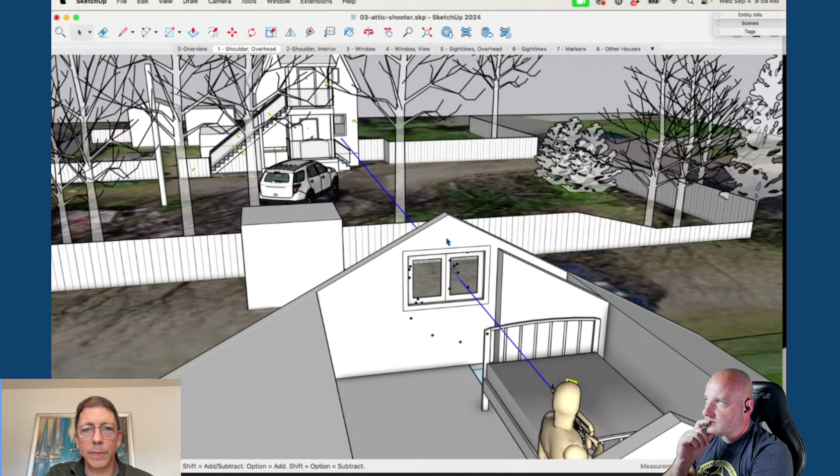I don't know if we've done a case where we were specifically asked to build out injuries and how they occurred sequentially in a timeline. But what's actually somewhat common is when we're working on cases involving a forensic expert or a ballistics expert offering an opinion about how a set of injuries would have likely been caused, given the facts in the case, we can actually map injuries onto human figures.

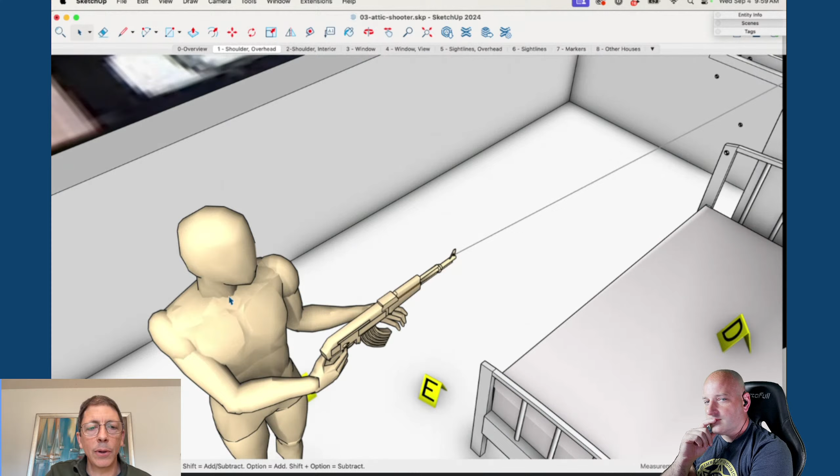This particular model doesn't have them, but we have little marks similar to these bullet strike marks that we can place inside these human components, on an arm or a leg or a neck, such that as we move the human figure, the injury moves with the arm or leg or neck. That can be a really useful tool when collaborating with a forensics expert, so they can see how different poses of this figure would potentially connect with the sequence of events or the injuries that might have occurred.

So if we think one particular in-and-out injury from a bullet trajectory was the first one, we might place the human figure in a position that would allow them to receive that injury from a particular shot.

So if, for example, let's take off the roof on this particular building. And if we had mapped injuries onto this figure, and there was more than one, maybe we'd say the first one was when she was facing the door and she received a front to back injury, and we'd map that on there and connect it with a trajectory. Then maybe she turned away and received a second injury in the side of the hip, and we'd have that one connected to another trajectory.

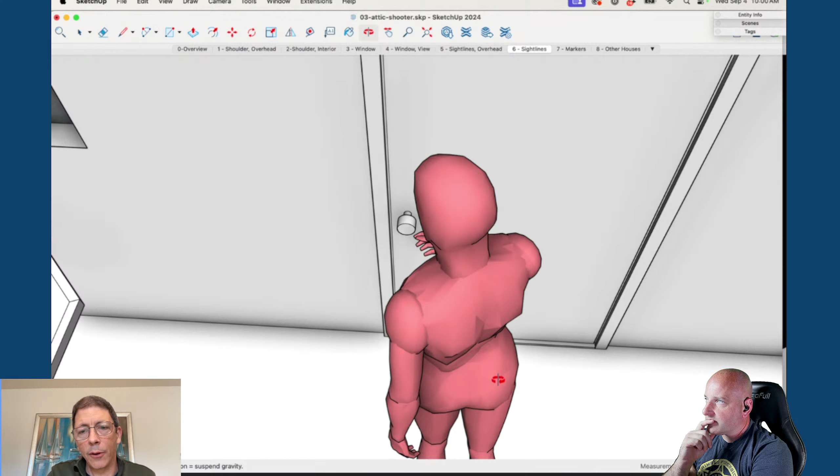So basically what we can then do, and you saw this in this other model where we had sequenced a series of movements. Let me pull this back up here. We can go through and understand the event sequence through a series of still frames. We're not trying to create a movie, like a 30 frame per second animation. We oftentimes wouldn't have the foundation for exactly how someone moved their body. We're just trying to create enough frames to tell the story.

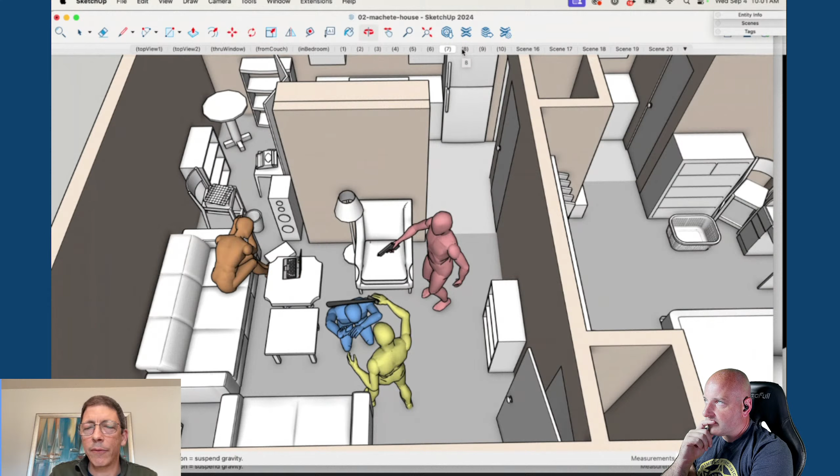So with the example you're giving, like what order did the injuries occur in, we would maybe just have one frame for each shot and show them in sequence, and then be able to explain this is the opinion of the expert or the finding of the criminal investigators. It's a really great starting point to have that discussion with all the stakeholders to the case.